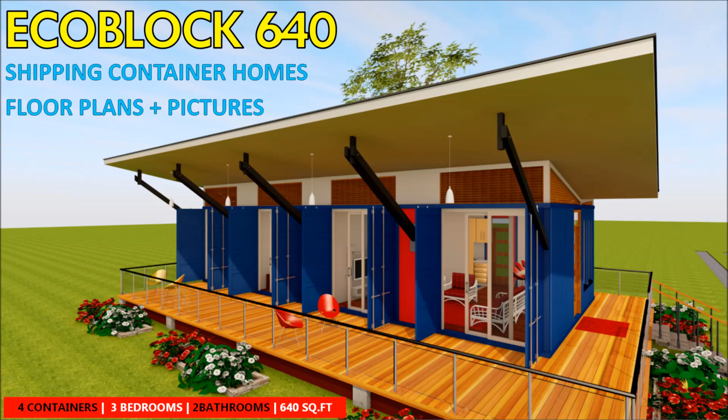Today we are looking at ECOBLOCK 640. Stay tuned to find out more about this interesting design.

Good, welcome back. So this 3-bedroom house is made using 4 20-foot high cube containers that have been arranged parallel to each other, leaving a 1 meter gap in between to increase the floor space by approximately 200 square foot.

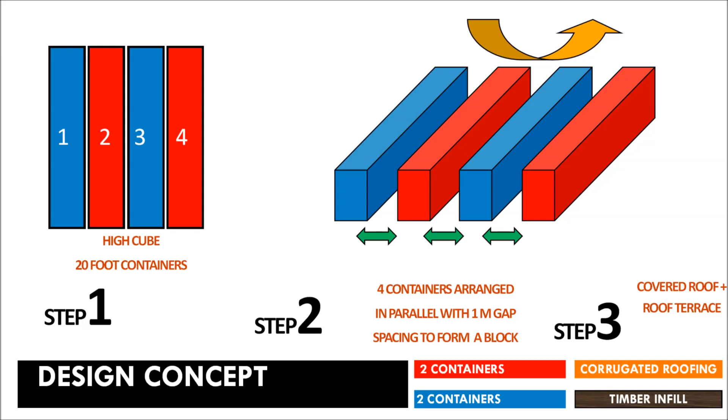So the frontal entrance is covered to create an entrance porch, and then on the side we have a big outdoor seating, which is a family terrace offering some private outdoor access from the living room, the master bedroom, and even the guest bedroom.

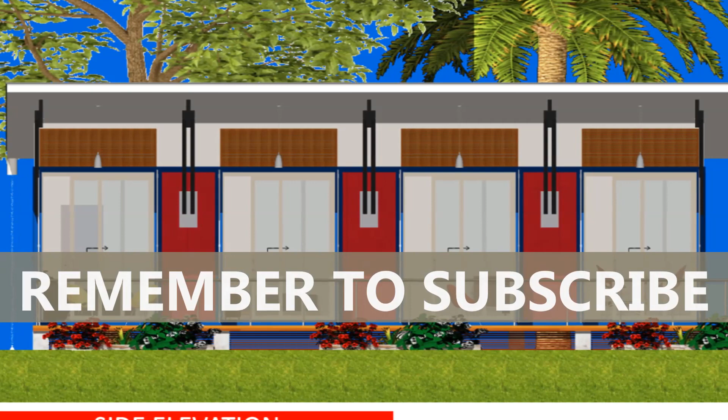So going to the design concept, as I indicated, we have 4 containers, and they're all high cube containers that have been placed parallel to each other with a 1 meter gap in between. So the intention of the 1 meter gap was to increase the floor space by at least an additional 200 square foot, because we already have the walls of the container, so there was no need of stacking 2 containers next to each other to create a double walling, unless you want to do something special like a specialized form of insulation.

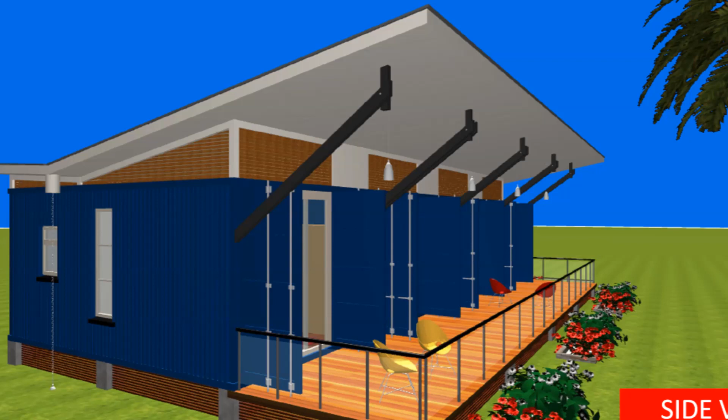So the house is covered with a skillion roof to create an interesting dynamic design and also to protect the containers from weather elements. And then the gaps in between the containers are filled with an infill material. It can be timber, it can be plasterboard, depending on your choice. And then we have some interesting steel bracing for the roof to create an aesthetic feel to the outdoor space, and also for structural purposes to protect the long overhang roof on top of the containers.

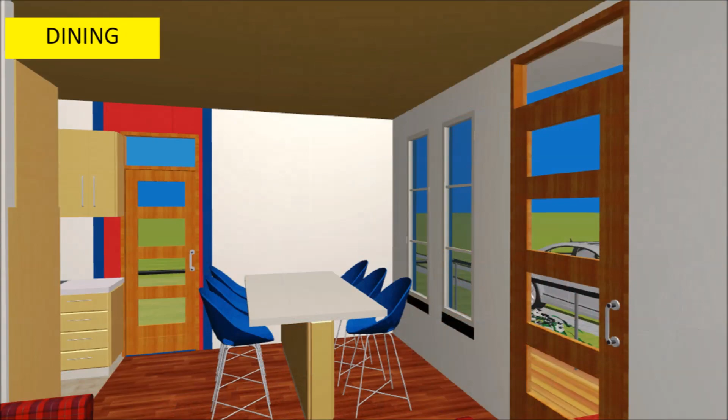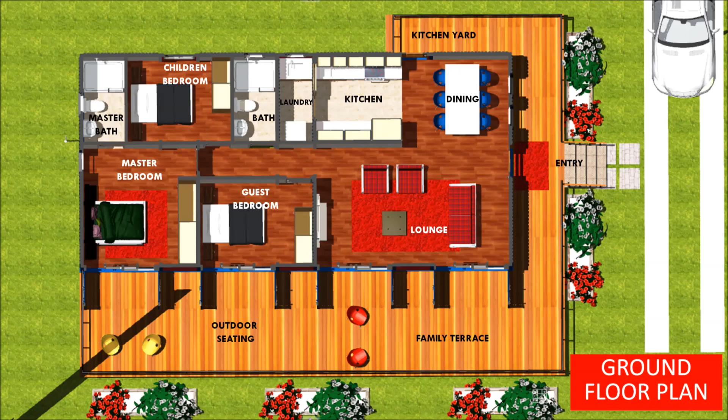Going to the design brief, the design brief is made up of the following salient features. We have the lounge, the dining, the kitchen, the laundry, the guest bedroom, the children's bedroom, a master bedroom ensuite, a walk-in closet, a master bathroom, an outdoor seating, which is a very big family terrace, and a kitchen yard. That's a private access from the kitchen on the back side of the container house.

Moving on to the foundation design, we have used reinforced concrete pier foundation. So we have approximately 18 piers with a 3-meter spacing center to center. We have also elevated the house 450 millimeters off the ground to keep the containers off from moisture, and also to allow plumbing with ease. We've screened off the deck underside using a wooden screen, and then we also planted flowers to offer some screening and also to soften the edges.

A timber deck, as we have included, is a generous way of increasing the interior space of a container house to just kill that claustrophobic feel of living inside a shipping container. So these outdoor sitting areas give you what we would call recess space, whereby you retreat onto the outdoor spaces during the day and you get into the house later in the evening or at night to sleep, because you spend more time outdoors. So the frontal access has been provided using that steel staircase to give you ample access to the elevated position of the shipping containers.

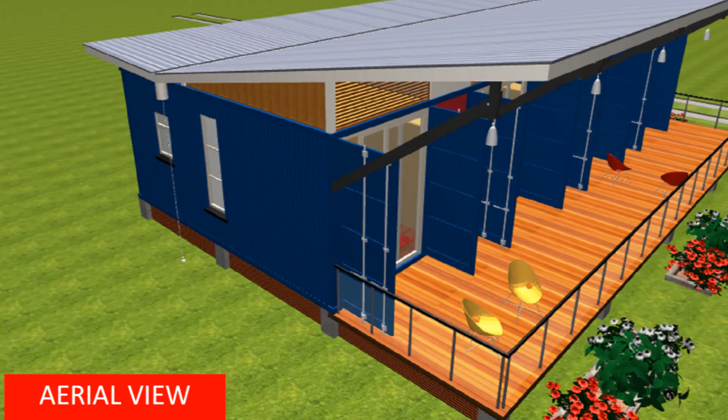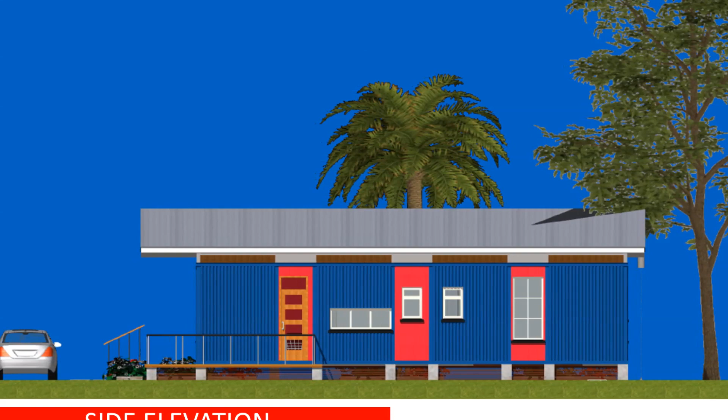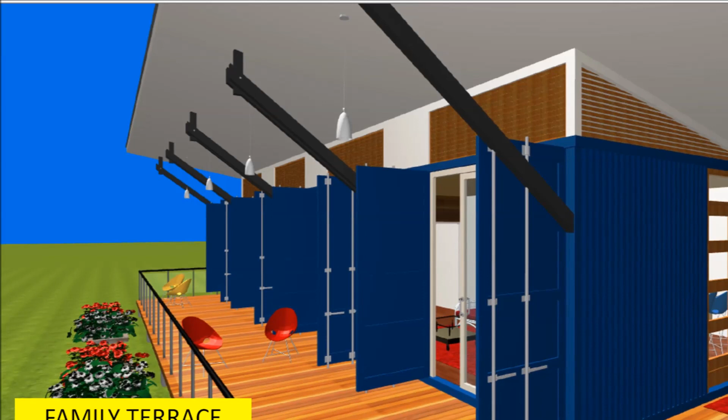So we've tried to maximize the use of the gaps we created for openings, and also we've retained the original container doors to offer access to the outdoor terrace, and we've fitted them with full height sliding glass doors to allow for access and also for protection from weather elements. So as a rule, at Shelter Mode, we don't tamper with the roof and the floor of the shipping container. This helps us maintain the integrity of those containers.

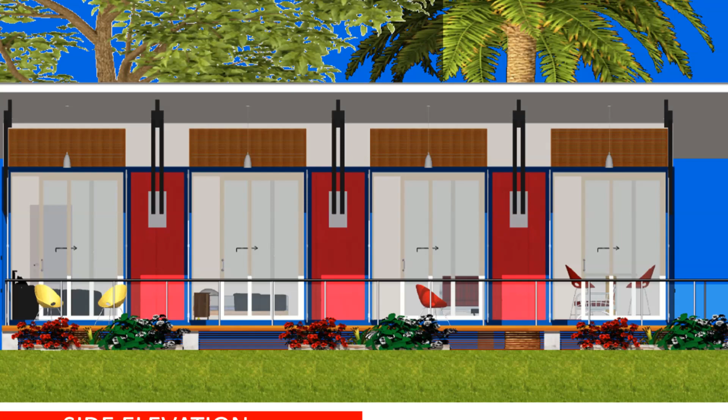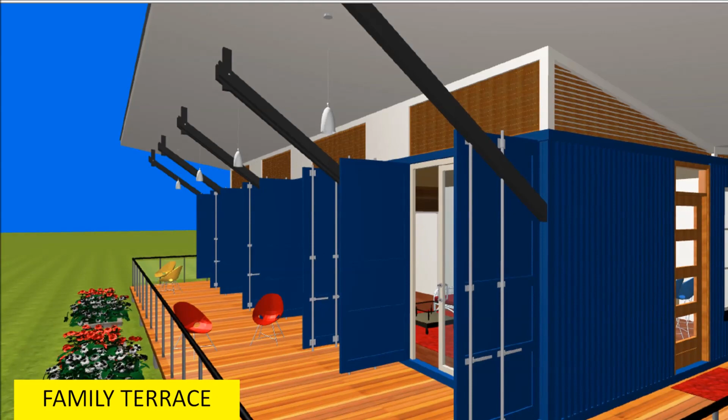So moving on to our next item, that is the outdoor living spaces. We had talked about the family terrace. We also have the issue of using a covered canopy. You can also use a pergola. You can also use a trellis with plantings to shade either the backyard or the outdoor dining area from the kitchen.

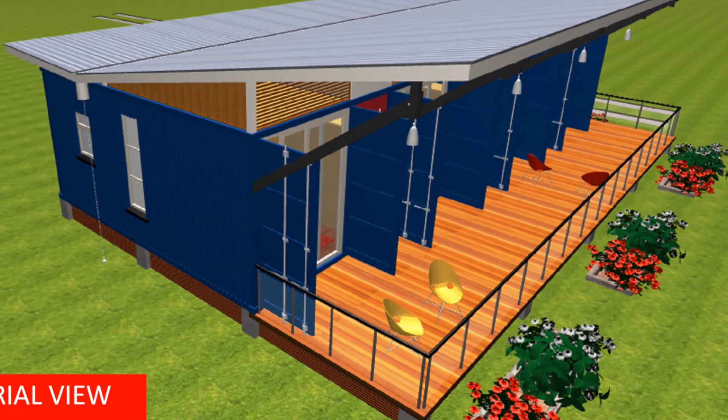Remember also to use a protective railing because the house is elevated 450 millimeters off the ground, so there's a risk of falling off the deck. So you need to use some protective railing to protect the users from falling over. The railing can be made of a material of your choice. So you decide what material best suits your house.

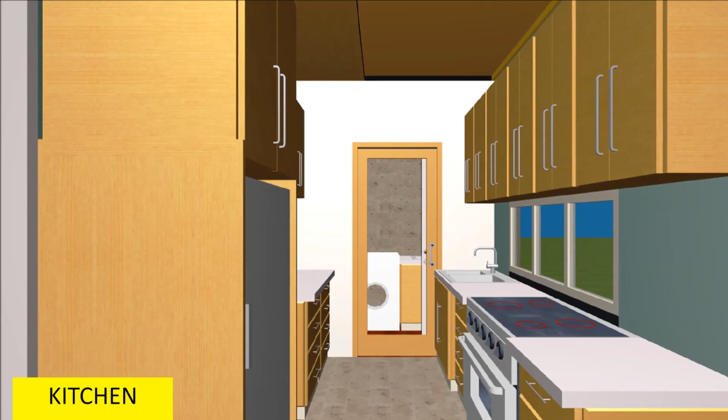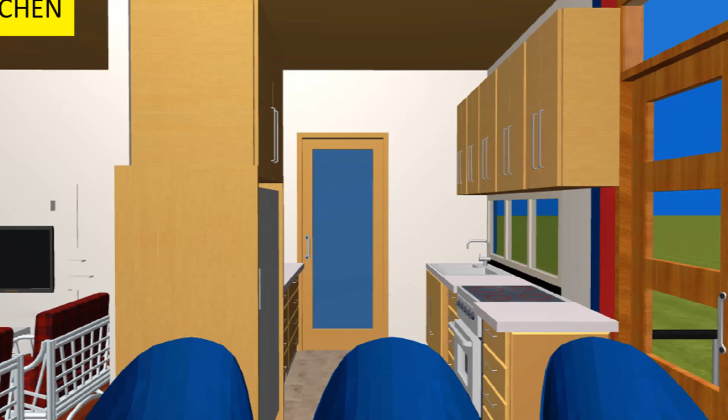On the interior design, as a rule, we advise to use a minimalist interior design as much as possible so that you don't make your house look cluttered. So use as little furniture as possible to make the house look bigger, and then you can try out multifunctional transformative furniture. We've talked about this in detail in our previous videos, so look at what we've done before so that you can try out those kind of ideas. Consider also using light colored finish for the interiors to create a monochrome feel so that at least the space looks brighter and also a bit spacious.

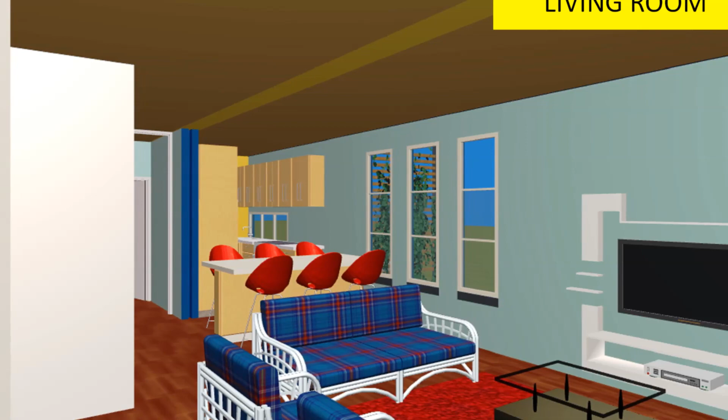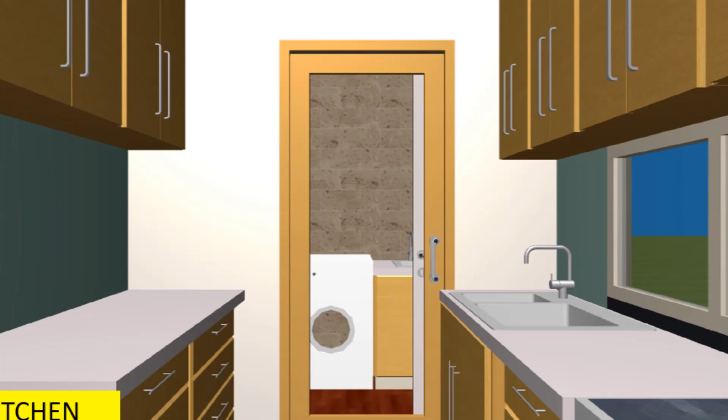Flat pack cabinets can be used for the kitchen and also for the wardrobes. Use similar materials for the kitchen backsplash area and also for the bathroom walls to create a bit of repetition in the use of materials, to create an interesting continuity in terms of space usage and also in terms of space perception. Sustainable materials can also be used for the interior finishes, so consider using materials like bamboo or plywood for the floor and also for the ceiling, and even for the walling if you are using plasterboard as your final material after insulation.

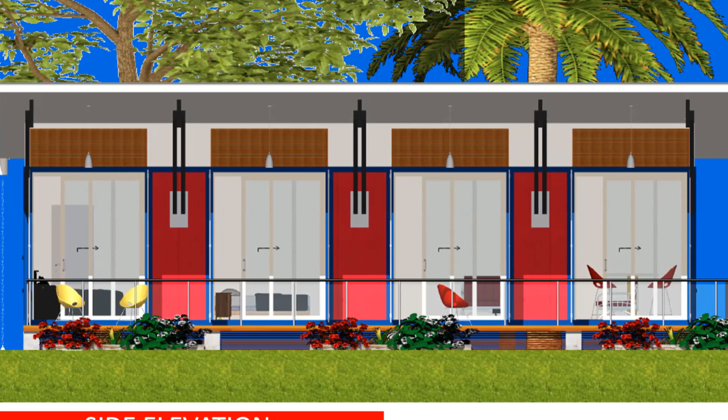Adequate daylighting is very important. It makes the space look spacious and also brighter and even bigger. So use adequate sizes of openings in terms of windows and doors to allow in a lot of lighting. And in this particular design, we have taken advantage of the end doors of the shipping containers to create full glazing to allow maximum lighting into the bedrooms and also into the living area.

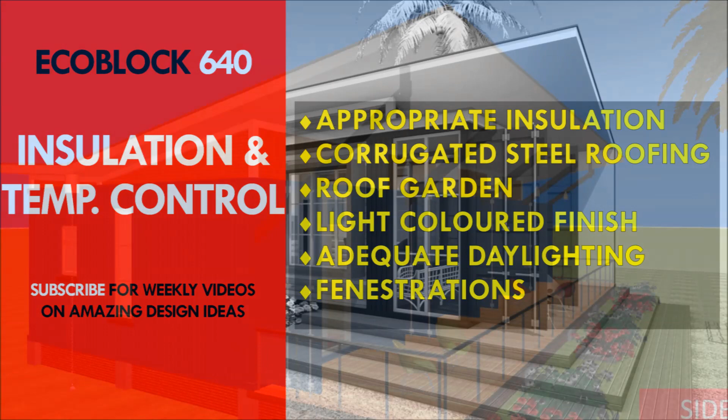So next we are looking at the insulation and temperature control. As we've indicated earlier, insulation and temperature control depends on your location. So if you are living in the tropics, you can do with very little insulation. You only need to control a lot of heat that is found in the tropics, so keep heat away from the interior space as much as possible. If you are living in cold climates, then you need proper insulation.

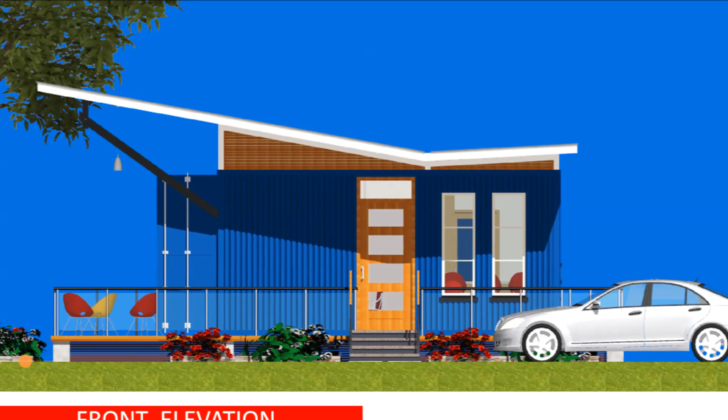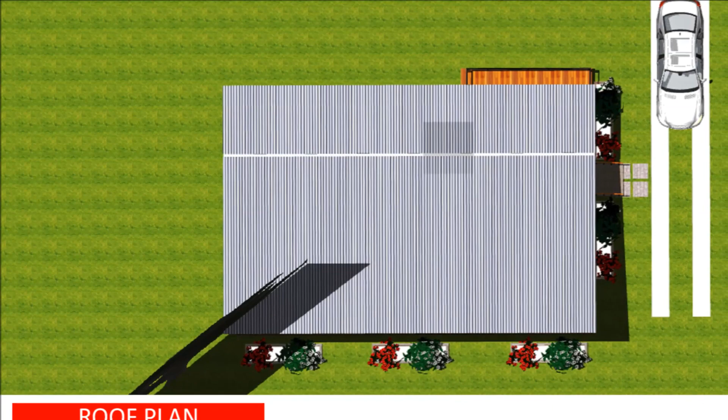And in this particular instance, we recommend closed cell spray foam insulation because it provides a very good moisture barrier, and it also has good R values for retaining heat and keeping away moisture and cold. We also have a corrugated steel roofing which has been elevated on top of the containers to allow for airflow to cool the containers and also to shield them from direct elements like rainfall. We also decided to use adequate fenestrations for windows to allow for cross ventilation, especially if you are living in the tropics. This is very important.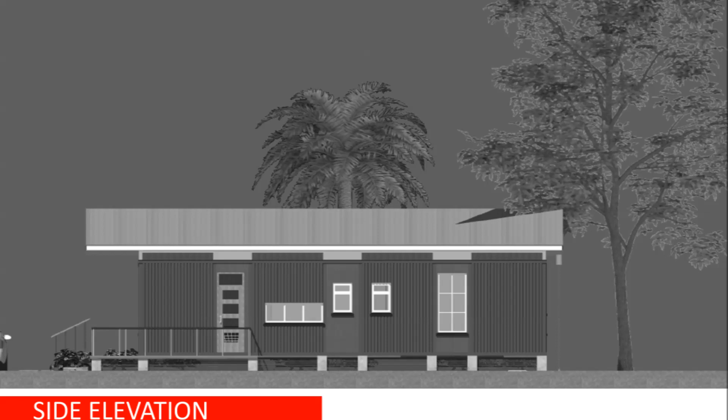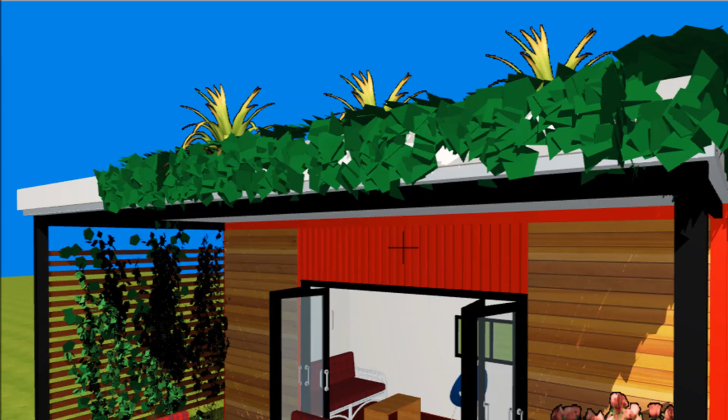If you want to consider using a roof garden, then in this particular instance you can plant the roof using a steel metal planter that has been elevated off the roof of the container, so that you don't load it with a lot of materials from soil and the plantings, because the roof is not very good in terms of carrying a lot of load, because containers are supposed to be loaded on the corners. So anything in between will interfere with the structure and the integrity of the containers. So consider doing that.

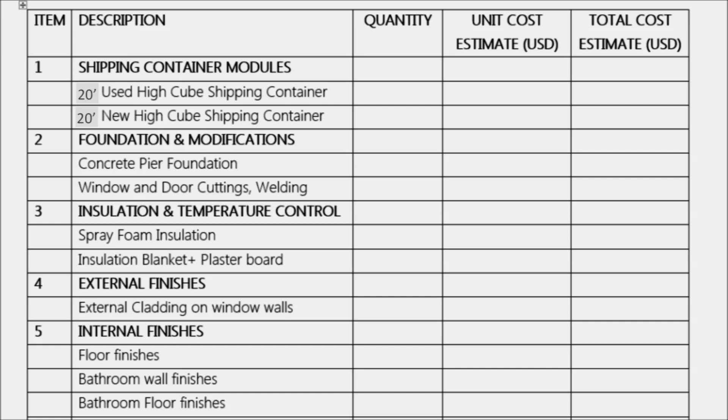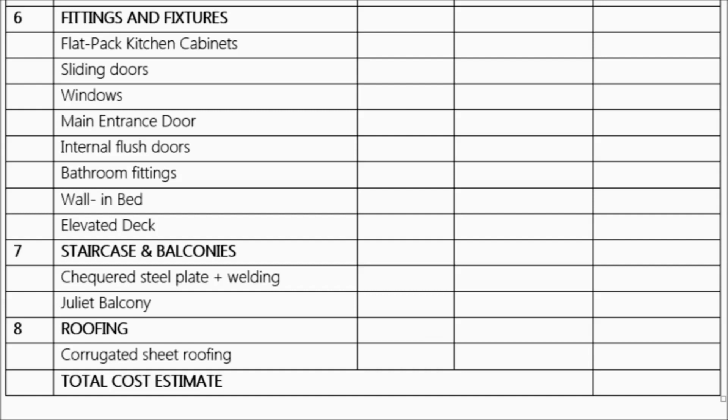In terms of the cost estimates, we normally provide a cost estimate checklist for every one of our designs, to guide you on how to go about your project in terms of cost estimate and even planning. So we have a list of items that you can consider, so that from the list you pick out what you need and what you don't need, and then compute the cost based on your country, because costs vary based on many factors such as taxes, regulations, the exchange rate and such like things. So consider what works for you and what doesn't, and from there pick out and use it in your container project.

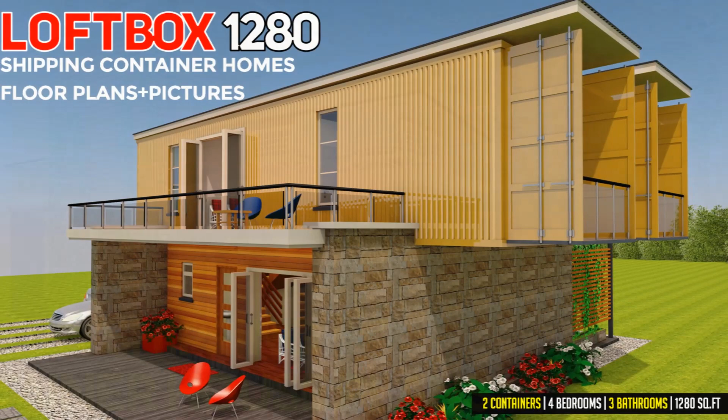If you need further inspiration, you can check out our other container homes such as ECOBOX 160, ECOBOX 320, and other projects like STACKBOX 1220, SPLAYBOX 1280, CROSSBOX 1280, CLIFFBOX 640, SHEARBOX 640, and even LIFTBOX 480. So check them out so that you can find out what inspires you and incorporate those design ideas in your future container house project.